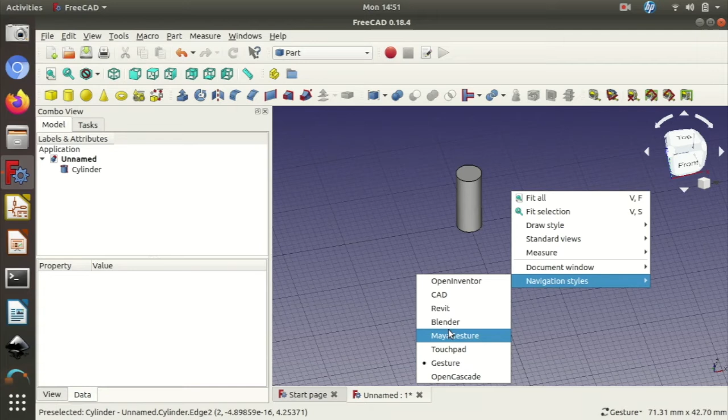If you right click and go to navigation styles, if you recognise any of these, so for example, if you've used Blender or Maya before, it might be that you're more comfortable with that setup. So click one of those, and it will navigate however that software does. I use this gesture one.

It's just something I've got into, and what gesture means is that if I left click and move the mouse, it rotates not the object, but the view of the object. If I right click and move the mouse, it just moves the object but doesn't change the viewing angle.

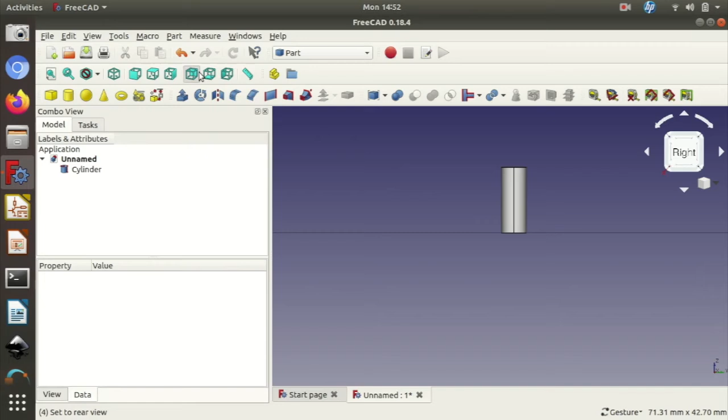And if I use the center wheel or the center button, I can zoom in and out by moving up and down with the mouse. There we go. Other ways that you can interact is you can use this cube to rotate the angle or return to a particular face. The other way is you can use these tools up here, which basically the solid blue surface is where you're looking from. So that's a few different ways you can navigate.

Okay, so we've created this cylinder, and you'll notice that we can select individual parts of the cylinder. Oh, sorry, zoomed in a bit too much there. Or we can even select the edges of the cylinder. And that's because solid objects tend to be made up of a flat surface and edges. If we want to select all of it, we can come over here to this file view, a left click, and that selects everything at once.

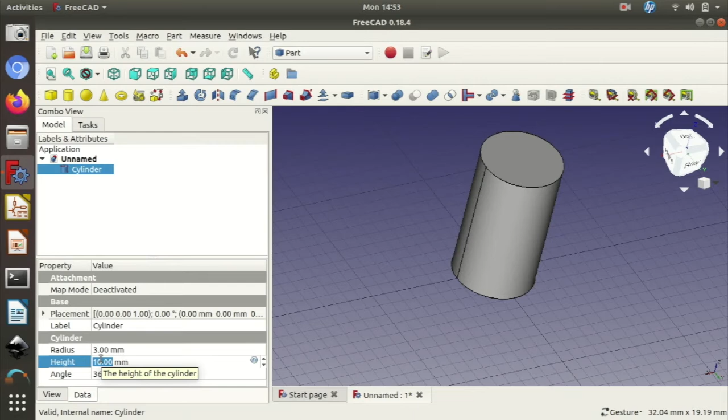If we've single clicked that, we should have this dialog down here, in which there are some things that we can change. So the most obvious ones we'll look at are radius. So if I change the radius to 3, it gets bigger. If I change it to 34, it gets really big and we'd have to zoom out. If I put the radius at 3 and change the height to 12, it gets taller. If I make it 2, it gets shorter. Pretty intuitive stuff.

The other thing people ask a lot about is, how do you move an object? So if you double click on the object in the file view, you end up with this set of arrows and points, and what these allow are for incremental steps of movement in the given axis. So if I grab this red x-axis arrow here and pull it along, it sort of clicks along. Compared to the grid behind it, it clicks along in 1 millimeter increments. The same if I click the z-axis and pull it up or down, and the same if I use the green axis, the y-axis, and pull it across.

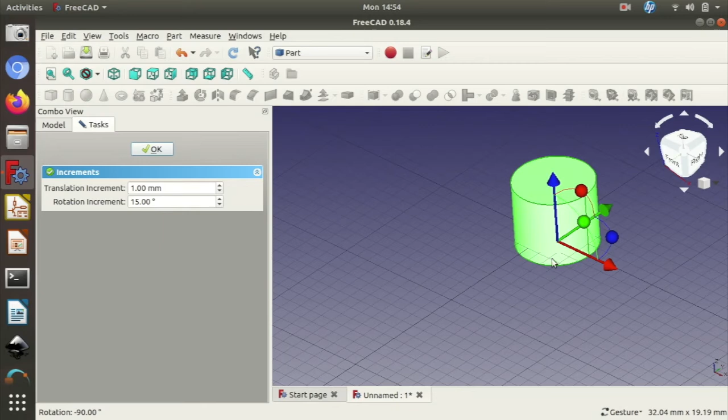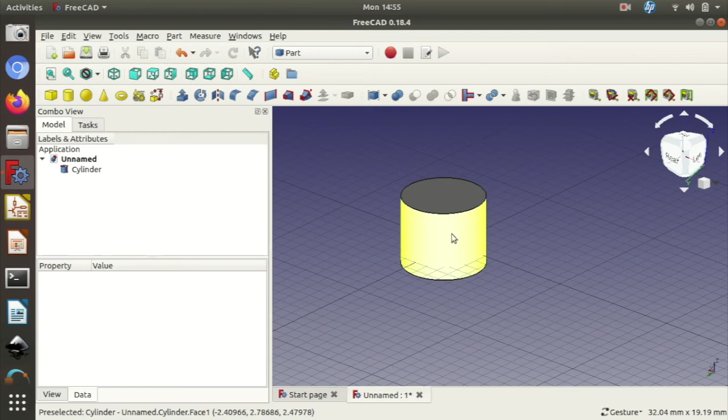Rotational increments are, if I grab these little spheres, I can rotate it around a given axis, and I can change the amount. So at the moment, it's set to rotate in increments of 15 degrees, which is kind of useful because 3 increments means 45 degrees, 90 degrees, etc. are quite easy to do. But if you wanted to move something very slightly by 1 or 2 degrees, you could simply change this value and then use the spheres again. So once you've finished moving it and you've got it in position, you can OK it and it stays there. Actually, let's just move that back so it's sat on the base of the reference plane.

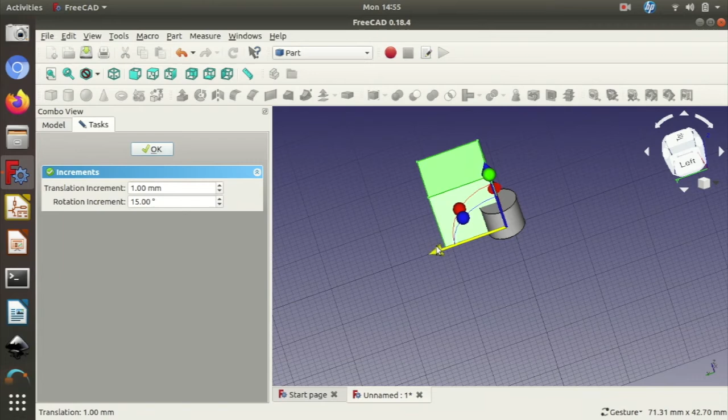Okay, let's create another object. Let's create a cube. Okay, so we've made a cube and it's placed it at the 0, 0 point. So those two things are overlapping. So if we didn't want them overlapping, we can select the object and we can move it out of the way. And like the cylinder, if we select the cube, we can change the length, width, height, and various other attributes of it.

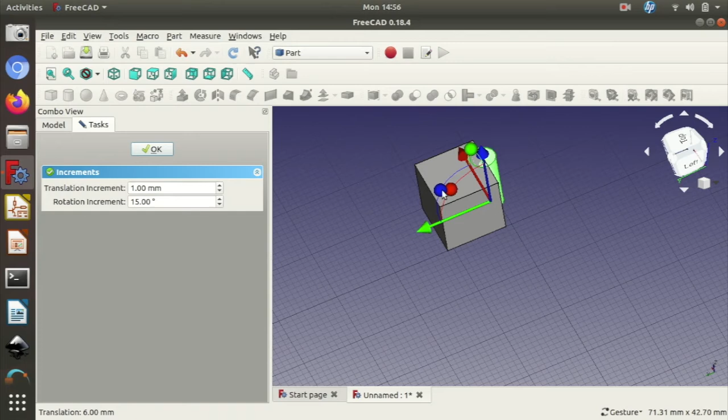One of the common ways of building objects is, let's say we've got this cube and we want to cut a hole out of the centre of it. So a classic way to do that would be to make the cylinder the size of the hole that we wanted. So say we wanted it 2 millimeters, and to go all the way through, then we could move it into the centre of the cube, roughly. Is that the centre? No, nowhere near.

But you could move this into the centre of the cube, and then still on the Part workbench, there's a great thing where we can select the cube by clicking it, and then hold down the shift key and select the cylinder. And then if we come up here, these blue and white objects are different Boolean operations that we can do. So if we make a cut of 2 shapes, this should cut the cylinder out of the cube. There we go. So you can see now that we've made a cube with a hole through it.

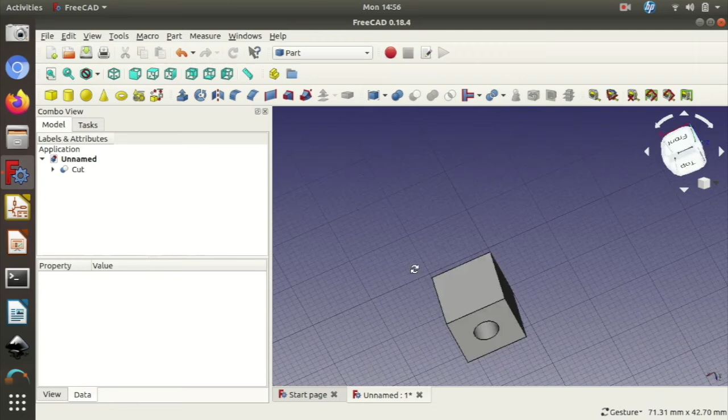Interestingly, this is now just called cut, and that's the top of the hierarchy of this object. If we click the little arrow, we can see the cube and cylinder are still there, but they're greyed out. If you hover over the cylinder and press the space bar, it makes it visible again.

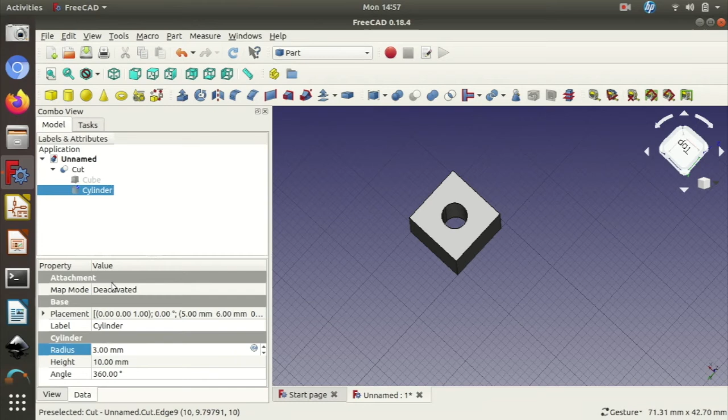Even though this object is cut out and not visible at the moment, it's a hole, and we can still make changes to it. Say we decided we want that hole to be 3 millimeters radius instead, we can make that change, and when we click off, it will recompute the cylinder as a cut out of the object.

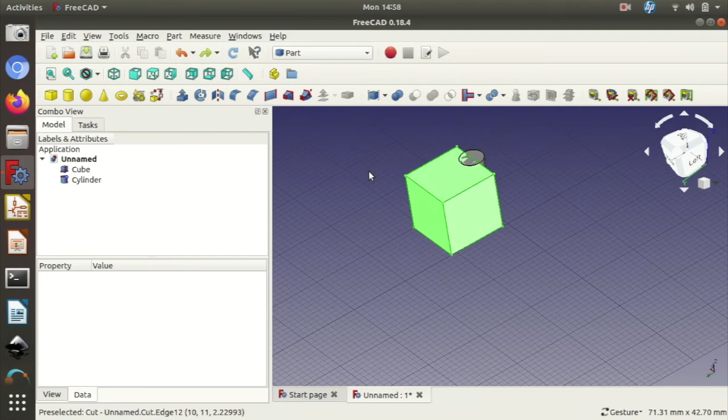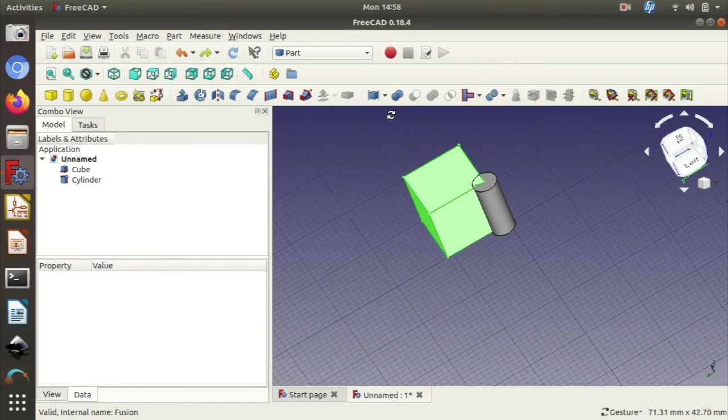Using that, there are other things we can do. Let me use Control Z to undo some of what I did. Say we'd moved our cylinder and cube, but we wanted these two things to be a union. We could make them a fusion of parts, and then select the whole thing as one object. There's lots we can do with these simple Boolean operations to build up a structure.

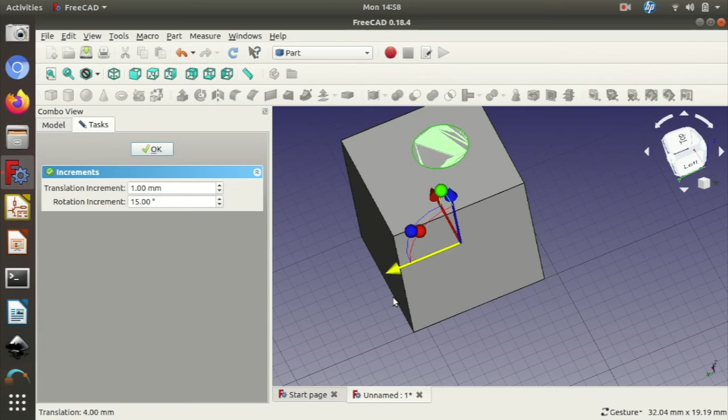There's other snazzy stuff the part workbench does. Let's make a hole again using our cylinder, roughly in the middle. There we go, that's in the middle. Select the cube first, since that's what we want to cut out of, then select the cylinder, click this, and now we've got a hole.

Say we wanted to put a nice rounded edge on this edge here. We select that edge by hovering over it—you can see it turns yellow, and when you click it, it goes green. With that whole edge selected, we use this tool, fillet the selected edge of a shape. We click it and get a dialog box; the selected edge is already chosen, and the radius is set to 1 millimeter.

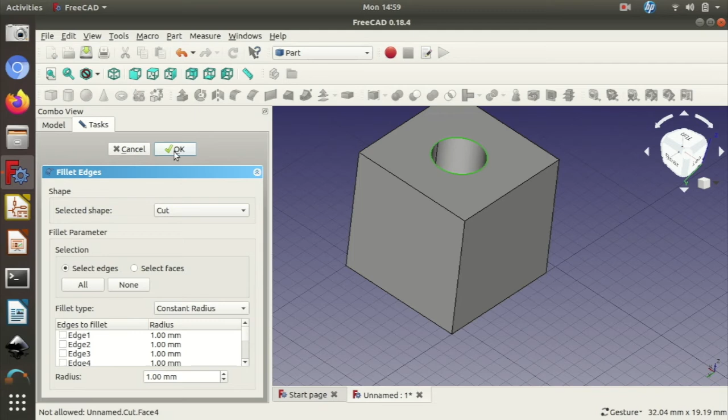Let's see what that returns. If we click OK, there we go—we can see it's applied a radius to curve that edge, and that becomes a surface we can interact with as well. There's lots we can do on this part workbench.

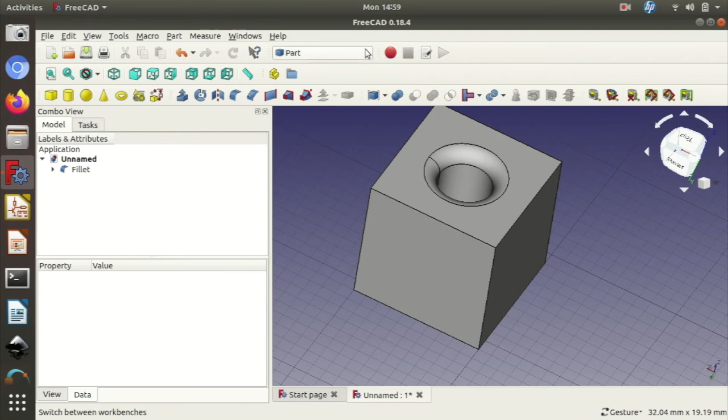Let's quickly look at a different way of creating geometry. Let's go to the Sketcher workbench, starting in a new document. In here we click this button, which is create a new sketch. A sketch is a two-dimensional drawing, and we choose which orientation we're looking at it in, or which plane we're going to draw in.

You can see this workbench has lots of different tools. These tools with a white line and red dots are all the drawing tools—tools to draw single straight lines, create arcs, create circles, create collections of lines, create rectangles and squares, polygons, and so on.

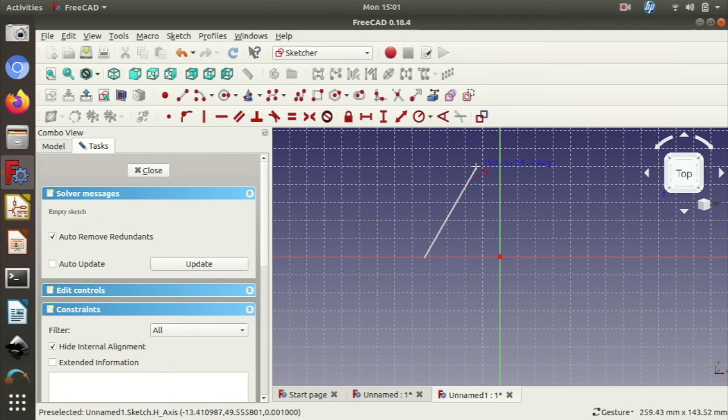Let's select the multiple point polygon tool, and say we want to draw a part that's like a trapezoid. You don't have to be accurate at this stage, but say that's our part. Just before I finish, I want to close this part by making the last line go from this point over to this point, and the way I join them is by left clicking to draw the line, then left clicking to finish on that point when it turns yellow.

So I left click there, and we've got our object. If I right click, it returns the cursor to a cursor rather than the tool. Okay, so this is our sketch, and that is indeed a sketch.

Notice this thing we're going to look at in a minute - it says under constrained sketch with 6 degrees of freedom. Constraints are basically things that tell the computer how long things are, what position in space they're in, where they are relative to other objects and stuff like that.

They can be really, really useful in CAD design, but they're also kind of not necessary all the time. So if we just close this, we end up with this sketch back in this view, and it's not a constrained sketch, so it appears as a white line. If it was a constrained sketch, it would appear as a green line. But we can do lots of things just with that kind of sketch as it is.

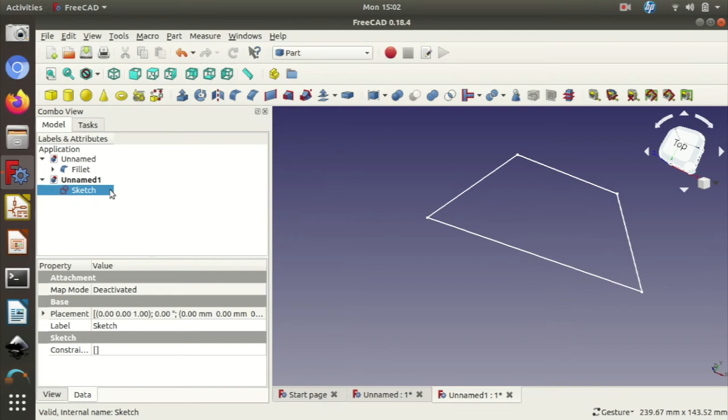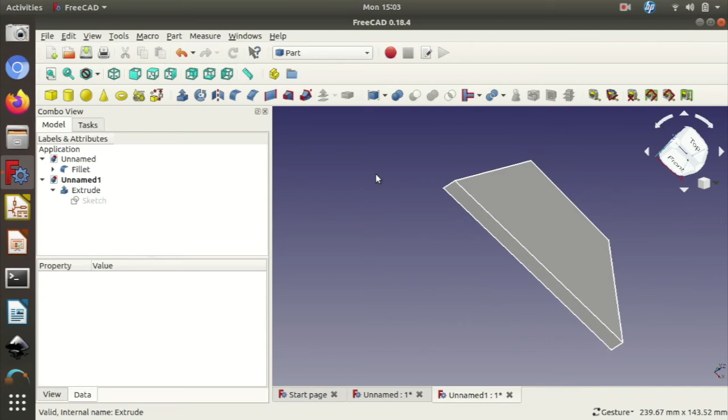So if we go back to, for example, the part workbench, with this sketch selected here, we could click this tool, which is extrude a selected sketch, and we can extrude it 10 millimeters, just leaving this as along normal. You can experiment with custom directions on your own maybe, but if you click that, you end up with the sketch now underneath an object called extrude, and it's a 10 millimeter extrusion of that sketch we just made. So that's a quick way of making an object.

But it's a less useful way than a fully constrained sketch. And if we go through it, it'll become apparent why at the end.

Okay, so I've just undone the extrude and double clicked to go back into the sketch to edit it. So the first thing I'd like to do is get this 6 degrees of freedom to disappear to 0 so that it's fully constrained.

One of the things I'm going to do to constrain it is - it's detected that when I've drawn this line, I probably want it to be horizontal, so it's given it a constraint. If I click this one and click this horizontal constraint, that's because I've got both lines selected. If I just select this line, which isn't horizontal, and click that horizontal constraint, it gives it that constraint and makes it a horizontal line.

Now, if I click and move this, it can still move in lots of ways, but it can never not be horizontal. Okay, so there we go - that's brought the degrees of freedom down.

We can do things like select this center point and this top line. We could set a vertical constraint - not between the lines, but between this point, one of the points on this line, and this point here. Let's set a vertical distance to set the distance between these two lines. At the moment it's 47.18, so let's put it at 45 millimeters. So that's added this dimension here.

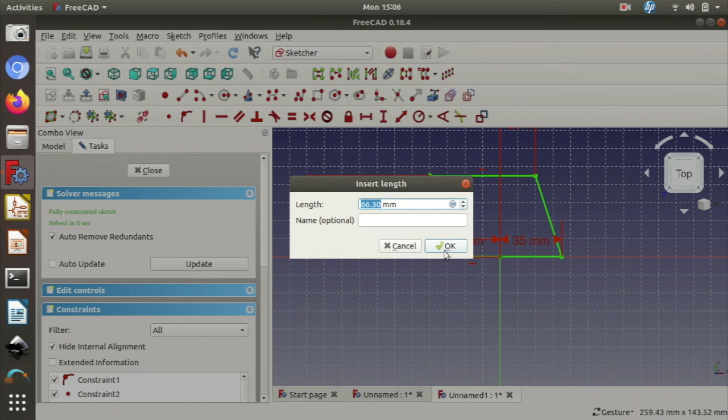There we go. You can see now that the sketch has gone green, and it's a fully constrained sketch.

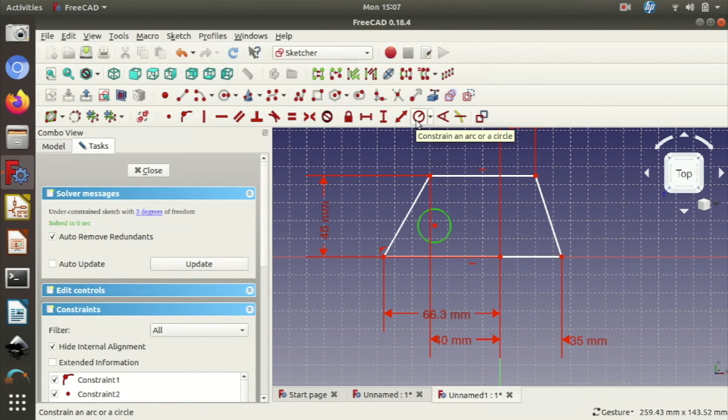Now, it's not immediately apparent why that's useful, but say we want a hole in this object when we extrude it. So we draw using the circle tool. You can click a center point and then click here. Now we need to constrain. We'll right click to remove the tool, select the circle, and we want to constrain the arc radius. Let's say its radius, we always want it to be 8, so a 16 millimeter wide circle in terms of diameter.

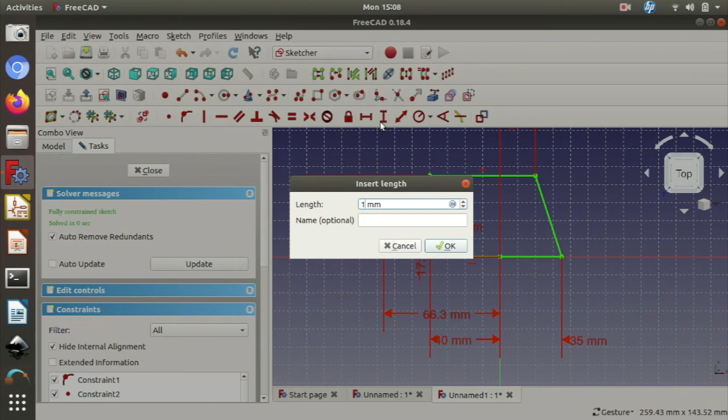Say we always, no matter what we do to change this end of this object, let's say the design means that we always want this center point to be 30 millimeters horizontally from that point, and 17 millimeters vertically up from that point.

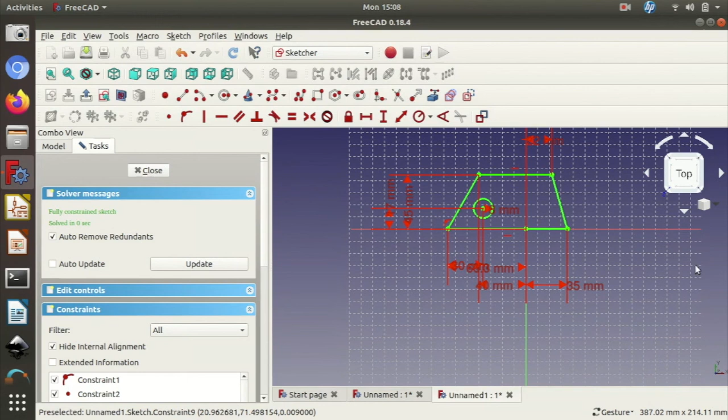So that's where constraining can get really useful, because it might be that we change this dimension here and change this edge of the object completely, but it hasn't skewed the object and it hasn't moved our hole, because that's constrained to other points of the object. Hope that makes sense. So a fully constrained object, we can still do exactly the same.

We've got this constrained object, and we can extrude it. Extrude it 10 millimeters again, and you can see that it's left that hole in there. And we can still do all these other things that we can do in the part workbench. We can apply fillets to edges and all that kind of stuff.

So there we go. There's enough perhaps there for you to get going with.

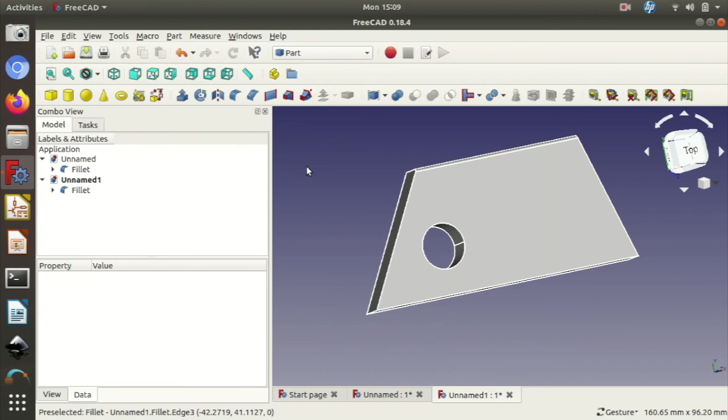Let's just have a very quick look at what we could do with our design. For example, if we went to the mesh design workbench, we can do a file export, and you have to select the object to export. So we want to select all this object, do a file export, give it a name, and it will save it as an STL mesh, which is exactly the type of file that we would use in the slicer software.

So you could take that STL file, load it in the Prusa slicer or the Cura slicer that we have on the machines in the Ffiws makerspace, and then put it on the SD card and print that object on the 3D printer.

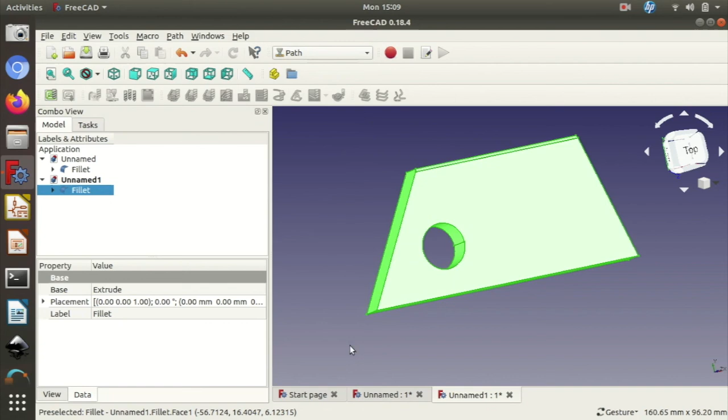What else are we going to look at? Oh yeah, just quickly, you could go to the path. Actually, let's not look at this in the path workbench. Let's just get rid of that. Let's open one that I did previously.

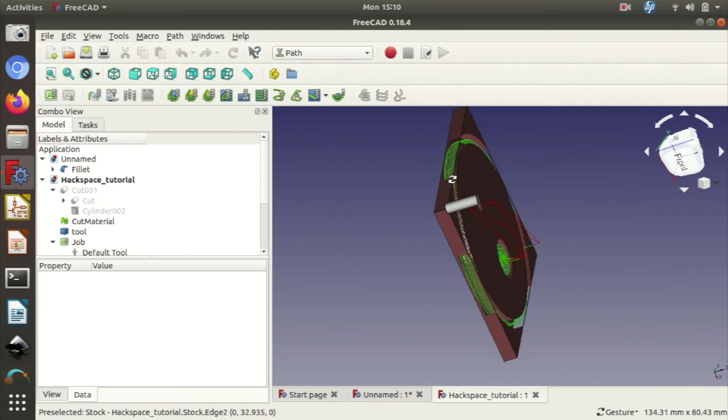So this is an object that I modelled in FreeCAD. I actually only modelled the central disc here, and these green lines and this cylinder here are representative of the tool and the tool path that this tool would take in the CNC router in the Ffiws makerspace to cut this object out of a flat piece of whatever, plywood I think in this case.

So yeah, it's a bit complicated, but I'll share a link, because I wrote a tutorial for Hackspace magazine, which you can get for free. You can download it, and you can read my 2-part tutorial in there about how you set up tool paths for the CNC machine to be able to cut objects that you've modelled in FreeCAD.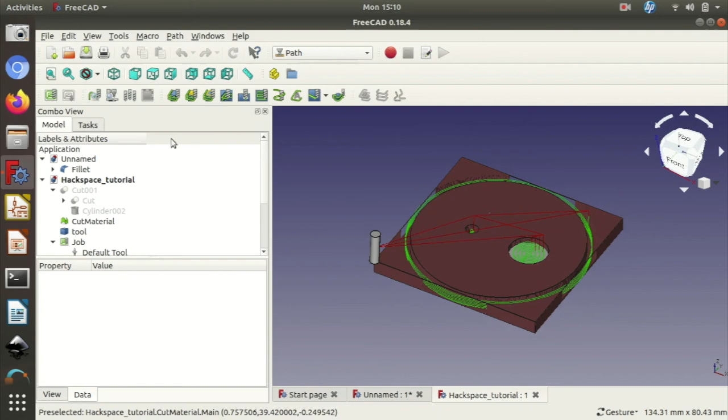But yeah, so for example, FreeCAD, just to show some of the power of it, it shows you how you can set up tool paths, and you can also set it up to kind of emulate the tool and show how it actually goes through the job and cuts the various things that you've designed and laid out tool paths for. So yeah, it's a really, really powerful bit of software.